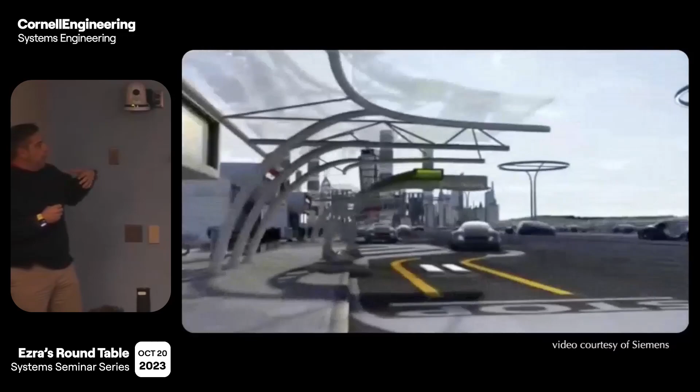We're about to transform from typical conventional vehicles with internal combustion engines and move on to completely electric vehicles. With this transformation, we have several opportunities and challenges. For example, we have the opportunity to upgrade our existing transportation infrastructure and enhance it with fast charging stations that can fast charge electric vehicles.

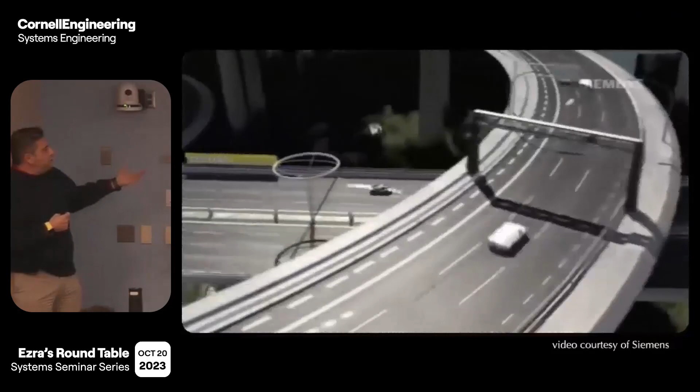We have opportunities to develop control technologies that can help us manipulate the increasing electricity demand from electric vehicles and optimize this demand in a way to avoid overloading the grid. We have opportunities to integrate the vehicles with commercial or residential buildings and eventually create off-grid buildings. With the introduction of connected and automated vehicles, we can share information from the vehicles and do better controls to optimize transportation efficiency and, of course, safety.

If you look at all these applications, there is a common theme: we have some cyber component, information or data, that we use to control the physical entities. So we typically address cyber-physical systems.

Now you might ask me, why do I focus so much on transportation? Well, in 2017, the United States consumed on average 19.6 million barrels of petroleum daily, and transportation accounted for 71% of that usage. This usage is enough to fill up the Empire State Building two times per day just to propel vehicles. So you can see the impact of transportation on energy is significant.

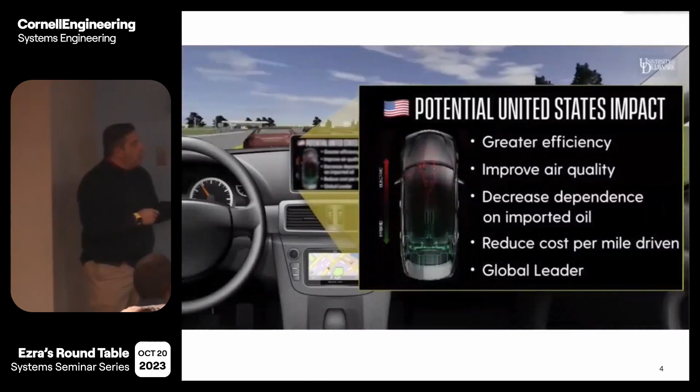With the introduction of connected automated vehicles, we have several opportunities to improve transportation energy efficiency and overall safety. So today I plan to show you some case studies spanning learning for CPS, particularly in advanced propulsion systems, and some model-based control approaches in connected automated vehicles. Through these case studies I've had the chance to work on in the past, I will try to highlight the challenges and opportunities in learning and control.

At the end, I will try to convince you that if we can combine learning and control tasks in specific applications under the CPS domain, we might be better off.

Before I get started, let me introduce and acknowledge the contribution of my students in the IDS lab. In the IDS lab, we develop theories and algorithms that can help cyber-physical systems realize their optimal operation while interacting with the environment. The focus of our research is mainly on emerging mobility systems and smart cities.

To validate some of our approaches, we have built a scale smart city which covers 20 by 20 feet. This is being rebuilt as we speak in the Hollister Hall, so it should be ready in about a month or so. In this city, we have about 50 robotic cars that we can use to prove some concepts in transportation. These cars are on a scale of 1 to 25.

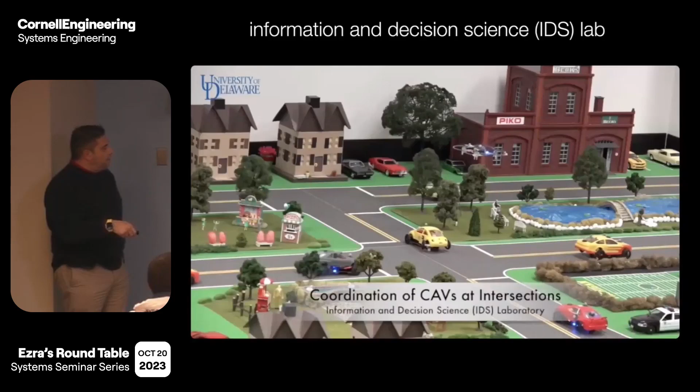We can use this to show how we can use drones as coordinators to collect information from the transportation system and then pass this information back to the vehicles in order to improve efficiency. As you can see here, in this case, the coordinator collects information from the vehicles and the vehicles can cross the intersection without stop-and-go driving. So we use this testbed to do those kinds of experiments in a safe environment.

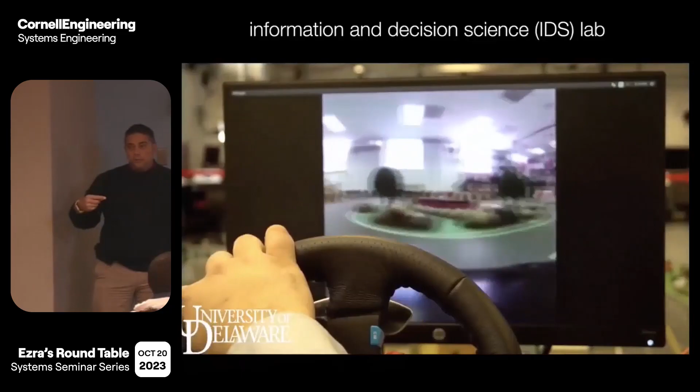We have also integrated a driver emulator into the robotic cars, so we can drive the robotic cars in the scale city and have a mixed traffic environment where connected automated vehicles interact with human-driven vehicles. The vehicles have a small camera in front, so as you drive the car, you can see through the monitor what's going on in the traffic conditions ahead of you. So the camera is over here, if you can see. This is another nice feature of the lab.

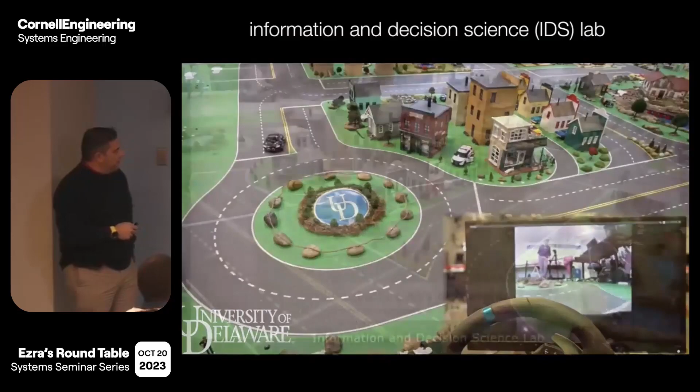We can also use it to have cooperation of ground vehicles with drones in specific scenarios that we want to validate, some of the game theory work that we do. We have built a digital replica of our scale city, and we can use this for our collaborators to sign in and do some experiments remotely.

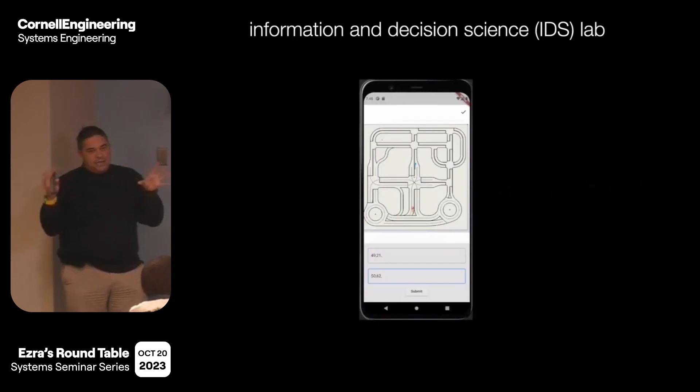Finally, we have developed an app that replicates shared mobility, where if you come to the lab, you can download the app and then call any of these little cars to come over to your origin, and then you can assign the destination. Through this app, we can validate some of the optimization algorithms that we develop in the lab and see the eco-routing approaches. So there is an infrastructure, and at the end, once you have different origin-destinations, you replicate some sort of traffic conditions, and then you can apply some of the optimization algorithms that we develop in the lab.

The city was featured in the IEEE Control Systems magazine last December, making it onto the front cover. We also have a driver simulation testbed with 6 driver emulators, and we use commercial software that can replicate any city that we want to investigate.

So with this little introduction, let's get back to the technical work.

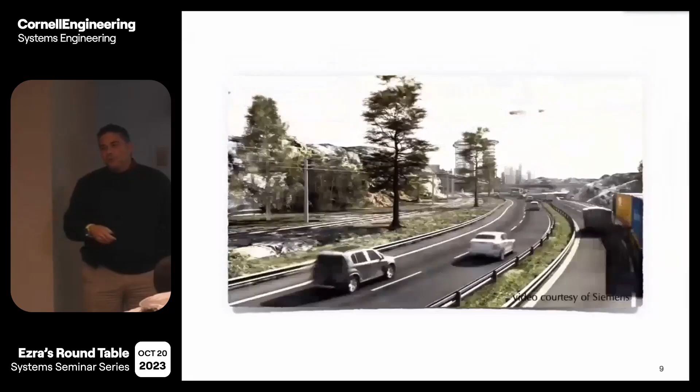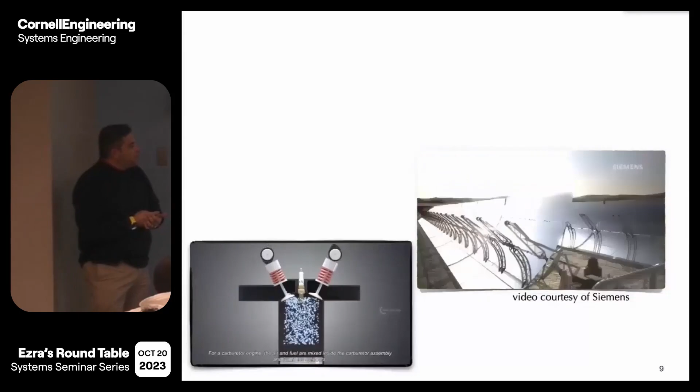Over the years, I have had the chance to work on different areas in transportation. I started with my dissertation, where I developed algorithms that can make the engine in a car learn the driver's driving style and eventually optimize its operation. Then I moved on to hybrid electric vehicles and plug-in hybrid electric vehicles, and developed power management control algorithms that can help us improve the efficiency of these vehicles.

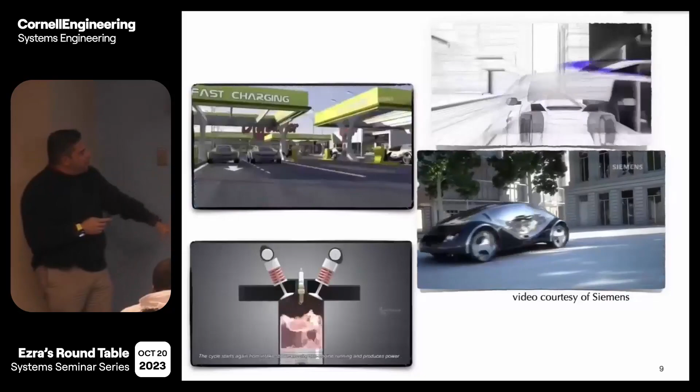Over the last 13, 14 years or so, I've been working on connected automated vehicles and how we can use shared information to improve transportation efficiency and safety. So what I plan to do is walk you through my journey, and as we go along, I'll highlight several technical challenges, and at the end of the story, have a lot of movies. So hopefully you have something to eat and enjoy, it's more entertaining. And then at the end, I will make the case about how we can combine learning and control.

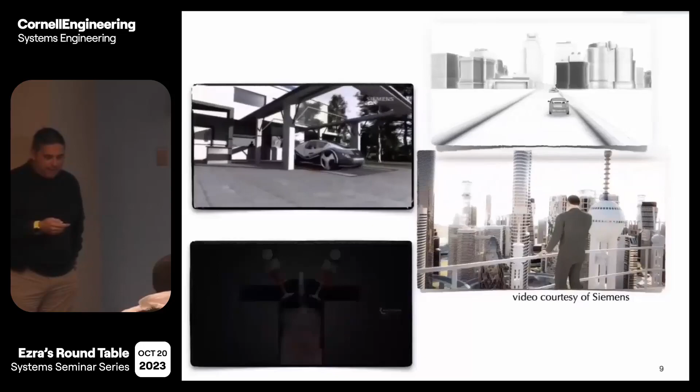My journey started in 2003 when I arrived in Detroit from Greece with 6 inches of snow, and I had to find a topic for my dissertation that would keep me busy for the next 5 years. As I was reading articles, as perhaps some of you are doing as we speak, to find an interesting topic for my dissertation, I came across some articles that essentially all had a common question: why can we not achieve the miles per gallon posted on our window sticker in cars? So I thought this was an interesting question that would keep me busy for the next few years, and I started digging into this.

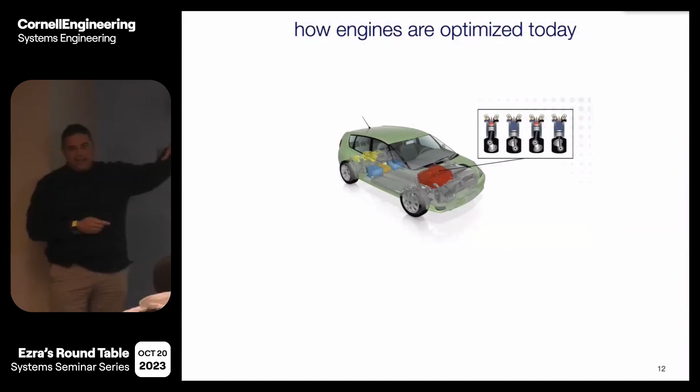So when we buy a car, the car comes with a window sticker, right? And it says this is the miles per gallon fuel economy for your city driving, and this is for your highway driving. And although most of the time you can achieve the fuel economy estimates for highway driving, you can barely achieve those estimates for city driving.

Let's see why this is the case. To understand engine operation, we need to look at the engine operating domain. You have a map of the engine, which is engine torque versus engine speed. These colorful contours are called BSFC maps, brake specific fuel consumption maps, and they give you fuel consumption per unit power.

So the lower the value, the better the fuel economy. As we drive the vehicle, this is the speed profile. As we accelerate, if you look at the engine map, you can see a point jumping from point to point inside the map, and depending on how you drive and where the point is located, you have a corresponding fuel consumption. Now, how do we optimize engines? The OEMs typically take the engine and discretize the engine operating domain, this colorful map, with a finite, typically small number of steady-state operating points.

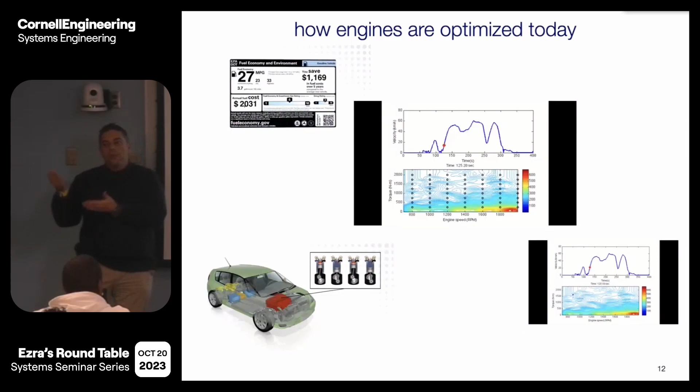When I say steady-state operating points, I mean constant torque and constant speed. They operate the engine at every steady-state operating point and compute the optimal values of injection timing, spark timing, all the variables of the engine. Then they have a big map, and they put it in the engine control unit of your vehicle. So as you drive the car through different operating points, the engine interpolates the values corresponding to the optimal points of the steady-state operating point, and this is how you operate the engine optimally.

However, when I was a graduate student in Michigan, some colleagues of mine did experimental work, and here's what they found. If we operate the engine at steady-state operating points, we have constant fuel consumption. This is why we get the estimates of highway driving, because the engine has been optimized for steady-state operation. So when you drive your car with cruise control at constant speed, this is how you get the maximum fuel economy.

However, if you approach this operating point from a sequence of operating points, fuel consumption will vary for a small transient period. And most importantly, if you approach this operating point from a different direction, fuel consumption is associated with different values. This is why we have the discrepancy when we drive in the city, because we drive in stop-and-go mode, a regime the engines have not been optimized for.

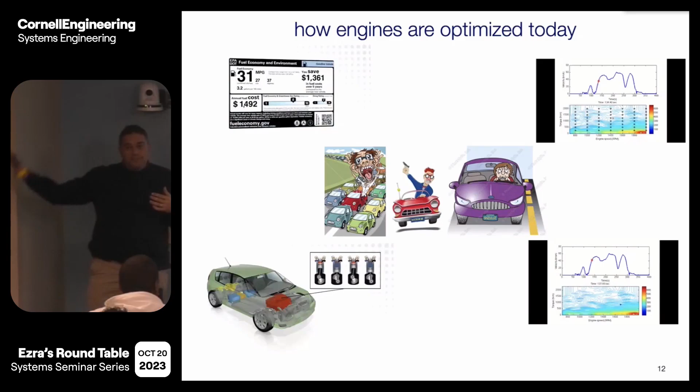Now, how can we optimize the engine for all these different driving styles? Well, this is impossible, right? Because everybody drives differently, so we can't really a priori optimize the engine for all these different sequences of engine operating points. So here's what I did for my dissertation.

I took the engine and applied what I had learned in the stochastic optimal control class, which by the way I'm offering next spring, called optimal control and decision theory. You might want to sign up.

So I modeled the engine operating point transitions as a control Markov chain, and then I learned the transition probability matrix as the driver drives the vehicle. I showed that this probability matrix converges to a stationary probability distribution, characteristic of the driver's driving style. So as the driver drives and we get a pattern of the engine operating point transitions, I learn this pattern, and then I can derive an optimal control strategy that optimizes my controllable variables for these engine operating point transitions.

So eventually the engine has a self-learning controller that learns the transition probability matrix corresponding to the driver's driving style, and eventually learns the optimal calibration with respect to that driving style. Now, if any other member of the family picks up the car, the engine can recognize that this is a new driver and start learning the new driver's driving style, and so on.

With this approach, we showed that we can improve the efficiency of the engine significantly. Just by doing better controls, you can improve fuel consumption by 8%.

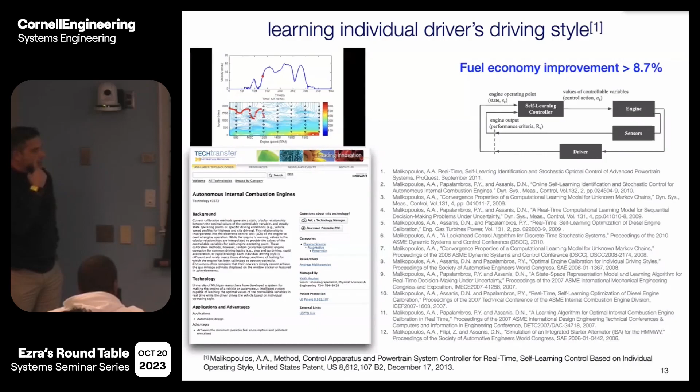Eventually, Michigan got a patent for this dissertation, and I've heard that a couple of years ago they had some discussions to license this technology to a Silicon Valley giant working on autonomous cars, who also want autonomous powertrain systems.

Now, this is all a good story, but I promised to highlight the challenges on the learning part. Well, here's one challenge: in this particular case, I start learning the transition probability matrix from scratch.

And I'm applying some control, exploring and exploiting what I've learned as I drive the vehicle. But in the exploration phase of reinforcement learning, I might pick up a value for the controllable variable for the engine that stalls the engine. And this is something we cannot afford. You cannot drive the vehicle and have the engine stall just because you explored a controllable variable that doesn't work.

And the challenge is that even if you get the feasible domain of your action space precisely to avoid stalling the engine, if you take this feasible domain for a car designed in Michigan to Florida, this feasible domain will change. If you take this car to another state, colder or warmer, it will change. So you can't rely entirely on reinforcement learning, on making your system learn from scratch. You have to have a baseline, some adaptive control schemes that ensure you don't get undesirable outcomes. That's challenge number one.

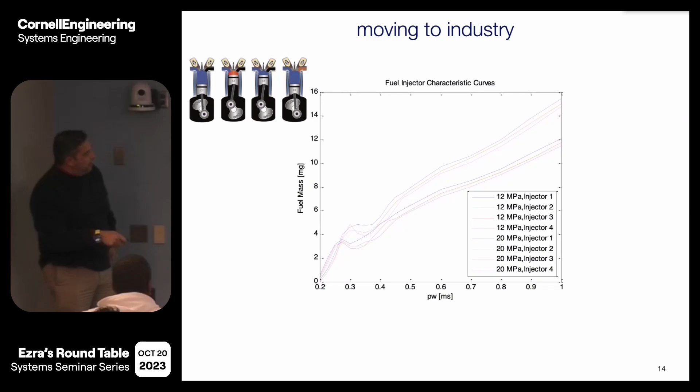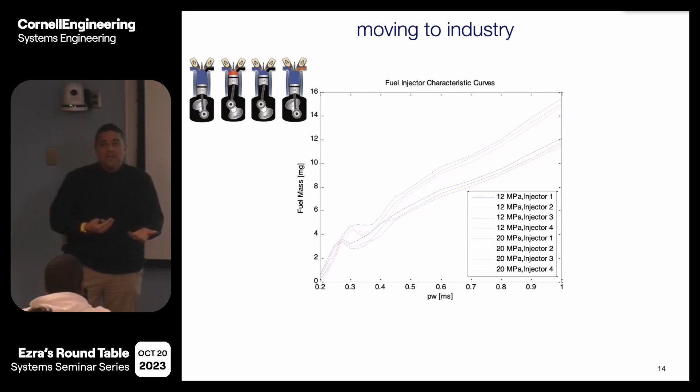But as you can see here, I have 4 injectors with injector-to-injector variation at 2 different cylinder pressures, 12 megapascal and 20. Four different fuel injectors means that if you have an engine with 4 injectors and command the same pulse width on each cylinder, you get 4 different fuel amounts inside the cylinder, which creates imbalances in the engine that can sacrifice fuel economy and emissions. You have to have precise injection of fuel inside the cylinder with a common pulse width.

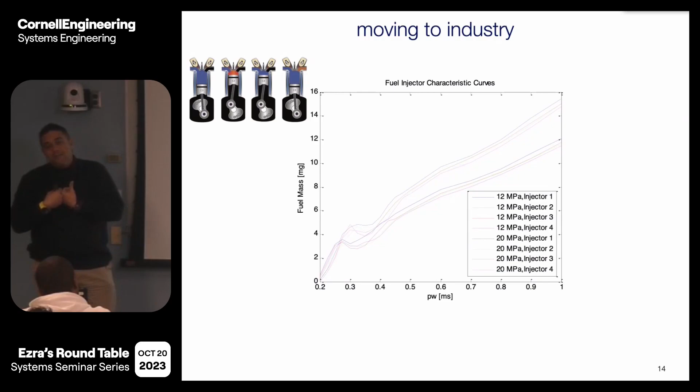So my project was how I could come up with an approach to learn these identification curves. You might think this is a typical, easy problem, just a curve to learn, very standard. Well here's the problem: in an engine, when I command the pulse width and get the fuel, I cannot measure the fuel inside the cylinder. I don't have a sensor inside the cylinder that gives me the amount of fuel injected.

So I don't have feedback, in other words. I don't even have air-fuel ratio on each individual cylinder, I only have a central air-fuel ratio downstream. So for me it was essentially blind. How can you control a system if you don't have feedback, if you cannot measure the output of the system? Eventually I combined a data set available offline and trained a big neural network.

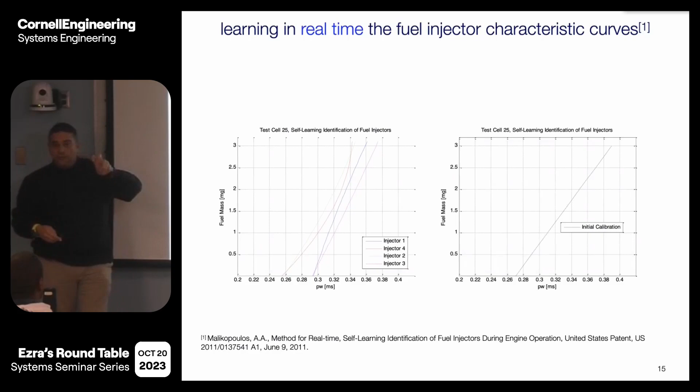But I could not rely entirely on supervised learning with neural networks. I had to attach some adaptive control schemes, and starting from an initial calibration guess, you can see the 4 true injectors, hopefully you can see the 4 different colors. The controller could identify the true injectors in a few cycles, meaning few milliseconds. So by sampling within a few cycles of the engine, I was able to identify the 4 injector characteristic curves by combining supervised learning with neural networks and adaptive control.

By being able to precisely identify the curves, you could improve fuel consumption for the engine by 4%, which is significant, because this costs nothing. It's just a piece of software that gives you 4% fuel improvement.

So what was the feedback or data that you were receiving to be able to do this?

I had offline data giving pulse width versus fuel consumption, experimental data that of course changes. They have fuel injectors, they tested these fuel injectors and collected data on pulse width and fuel amount. But if you take this fuel injector and put it inside the cylinder with different temperature and cylinder pressure conditions, this changes.

So that's why you cannot really rely entirely on neural networks. And then we had to do some adaptive control scheme on the fly just to make this work. And the adaptive control on the fly was based on what information?

Based on the available signals that I have: air fuel ratio, the central air fuel ratio. In the experimental and the demo vehicle that I have, I had also cylinder pressure, for each cylinder I had the pressure. So I had to interpret and extrapolate this information.

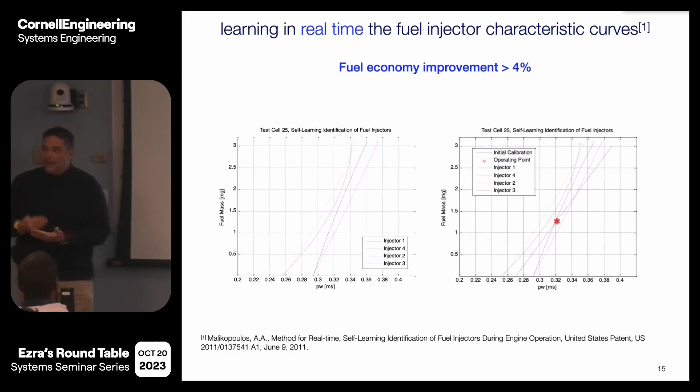And then after this project, I moved on to Oak Ridge National Lab and to another topic on power management and control for hybrid electric vehicles and plug-in hybrid electric vehicles.

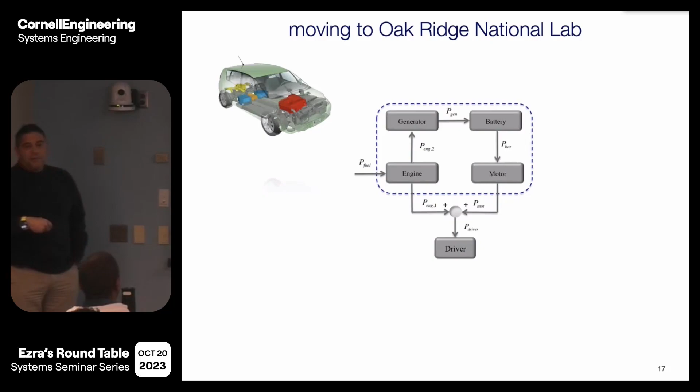So let's see what is a plug-in or a hybrid electric vehicle. In a hybrid electric vehicle, in addition to the engine, you have a motor, generator, and a battery that can power the vehicle either separately or in combination. As the driver presses the pedal position and asks for power, this power is being delivered through different combinations. You can have only the engine, or both the engine and the motor, or only the motor. And as you use the motor, you deplete the battery, right?

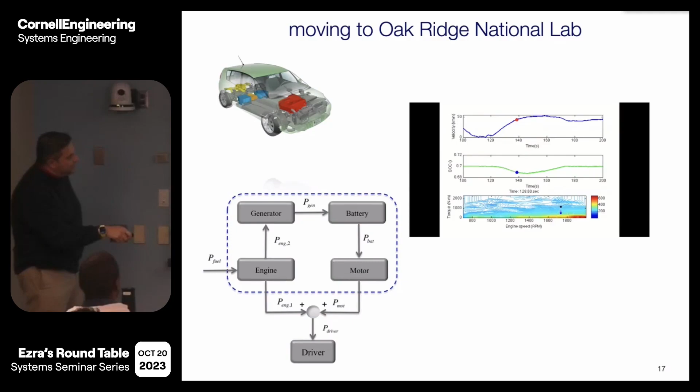So this is a scheme that you have the 3 dots corresponding to the 3 operating points: engine, motor, and the driver. The driver is the black dot, and this torque demand by the driver is being given by the motor and the engine. As you operate the motor, you deplete the battery - this is the state of charge of the battery, so it goes down. And this is the vehicle speed profile.

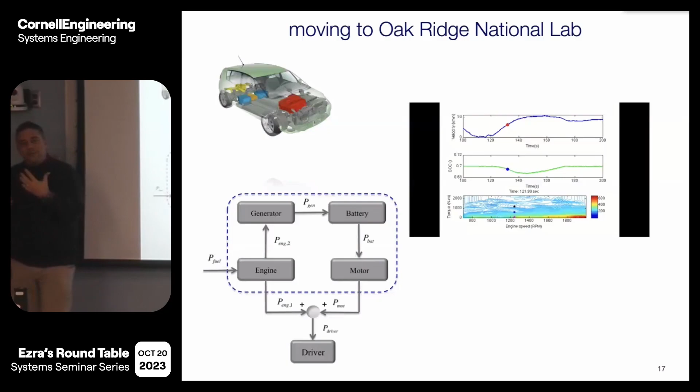So as you deplete the battery, you have to make the decision at some point in a hybrid electric vehicle to charge the battery again. So you have to command the engine to power the generator to charge the battery. So there's a multi-decision making process, but eventually in order to address this, you consider the hybrid electric vehicle as a system consisting of subsystems. And then the first step is to identify the feasible state and control action pairs of this system.

And then eventually you formulate a problem, which you will learn, some of you, when you take my class next semester - I'll keep advertising my class. So you want to derive the optimal control strategy that maximizes the efficiency or minimizes the losses of your vehicle, for any different driver.

Now, to solve this problem in real time on board the vehicle is infeasible. You can't really afford this in a production vehicle. So to address this and make it work, what I did, I reformulated the problem as a multi-objective problem where I want to maximize the efficiency of every subsystem.

I solve this problem offline, and I derive a Pareto optimal set for any different realization of the driver. So I had the map of the engine, the efficiency map of the motor. I put this in a big optimizer, formulated my problem, solved it, and created the Pareto frontier that can give me all the trade-offs between all these subsystems.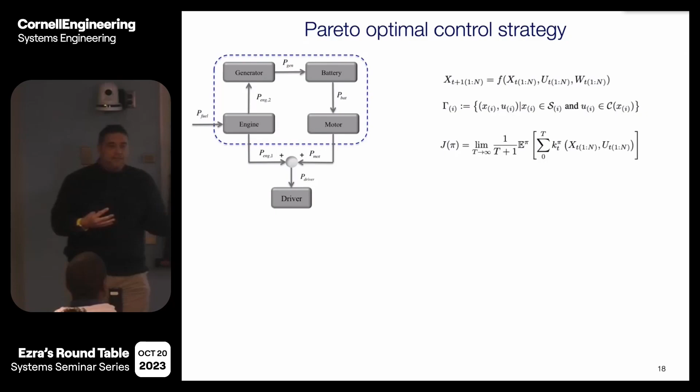And then I took this map, put it in the hybrid electric vehicle, and operated by interpolating the Pareto optimal operating points. And I show in a result that if you operate the system on this Pareto optimal operating point, then the average cost per unit time is minimized. The average cost per unit time means that you want to minimize the cost or maximize the efficiency in the long term as you drive the vehicle for days, weeks, and months.

Anyhow, we did some simulation and compared this approach with reinforcement learning, and we got the same solution - for the reinforcement learning, that was dynamic programming, but using reinforcement learning. We just took the model of the car and ran it again and again over the same driving cycle, and eventually the system learned the optimal control strategy. Then to compare it with our approach, we ran the same model with the Pareto optimal solution in real time once.

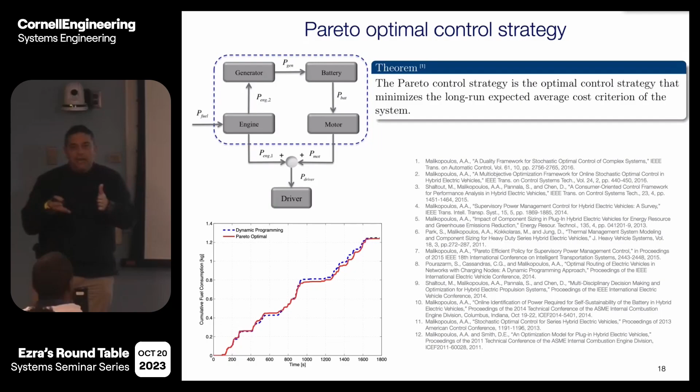By interpolating the Pareto optimal control, we got the same solution.

We went further and implemented this in a demo vehicle. We had an Audi plug-in hybrid electric vehicle, model 2016, as part of the ARPA project that concluded a couple of years ago. We ran the model with Audi's baseline controller that the vehicle has.

Given this operation, we were able to beat Audi's controller by at least 12% in different case studies. This is actually in production, this code. Bosch was my industrial partner, and they have taken this into their portfolio. That project we completed three years ago, so perhaps some of the new vehicles might have this algorithm.

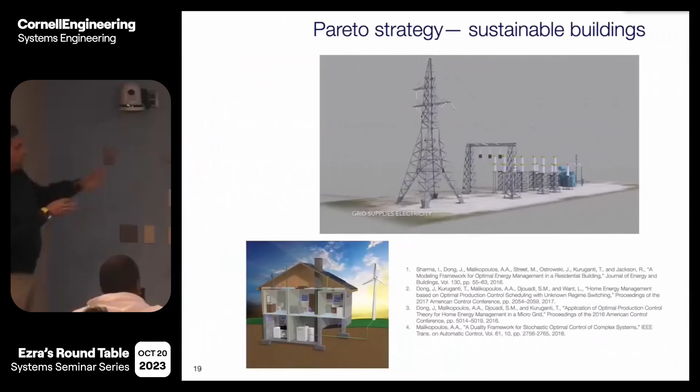So that was the case with power management control, but we use this approach for more.

Are any of these control strategies going to maybe in the future become destination aware, so you know what the terrain is and where you're headed?

Yes, actually, I didn't mention in this project, the goal was to improve Audi's efficiency by 20% by optimizing the powertrain, and also using connectivity and automation, which I will show you later on.

Essentially, the car used information from the vehicles and from the infrastructure, and given this information, we improved the powertrain and also the speed profile of the vehicle by having it coordinate with other vehicles and avoid stop-and-go driving. We also had an eco-routing approach, which took into account the route of the vehicle.

Given that, we could decide about the target state of charge of the battery, the optimal target. So there was a combination. The portion I just showed you was without using connectivity and automation, just the powertrain.

The partners of this project were University of Michigan, Boston University with Christos Cassandras, whom you met, Oak Ridge National Lab, and Bosch as the industrial partner.

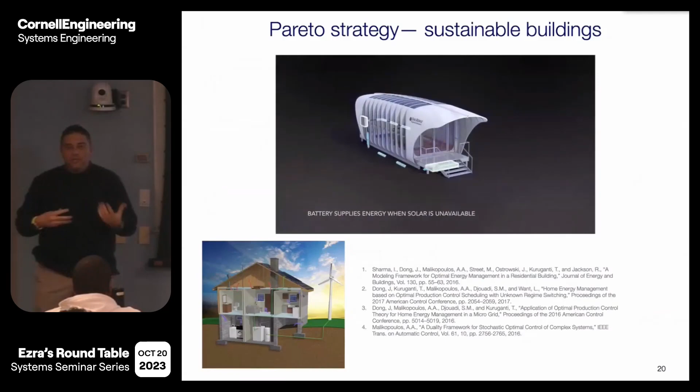We used the same approach in another project at Oak Ridge, where we have a vehicle, a building, and different renewable resources like battery and wind. The goal of this project was to distribute the electricity demand to different resources and make the building independent of electricity from the grid, an autonomous building.

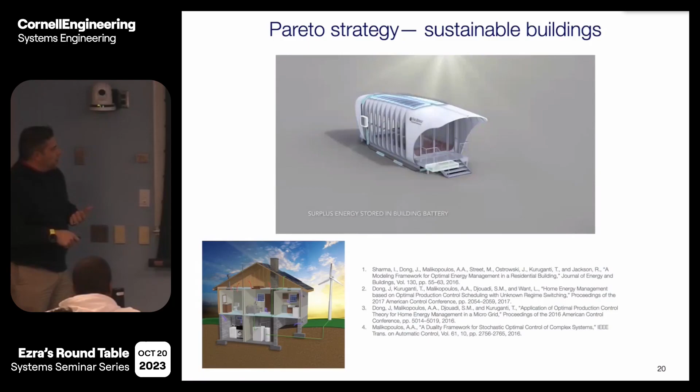In this project, we showcase that when we plug in an electric vehicle, we could use its battery to either charge the building or get charged back, with different combinations and decision making involved in this case.

Then at some point I got involved with connected automated vehicles, and the idea was how we can use connectivity and automation to avoid situations like this. If we have shared information from the vehicles, can we use this information to improve transportation efficiency?

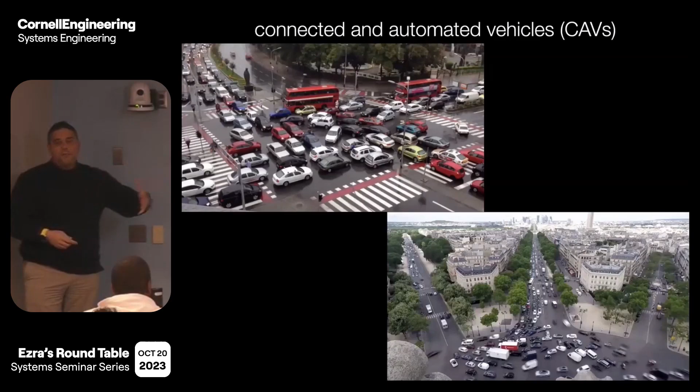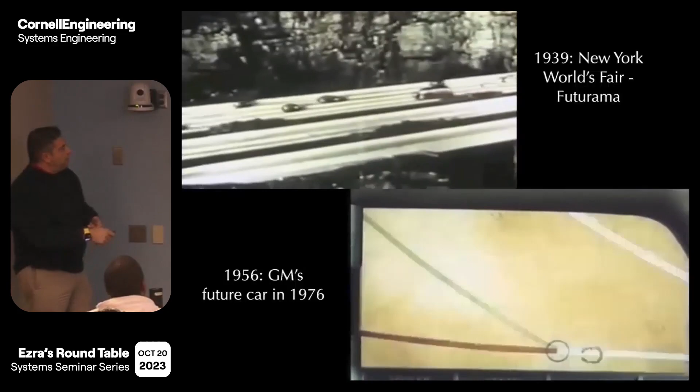Actually, those ideas are not new. In 1939, the notion of automation was first mentioned at New York's World's Fair Futurama, when they envisioned a future world. One big portion of this exhibition was about transportation, envisioning highly efficient transportation systems where all vehicles could cruise at high speeds in a safe way.

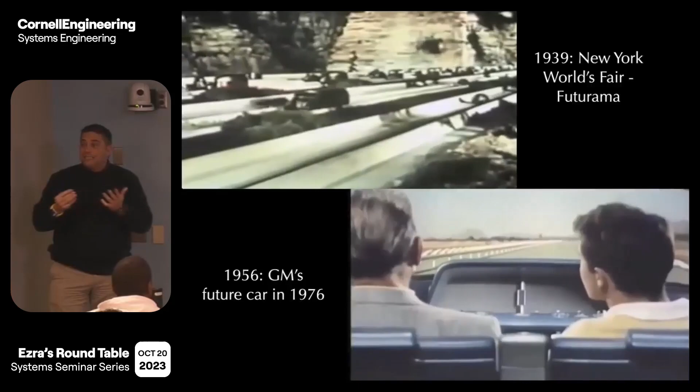In 1956, GM featured a film, '20 Years Into the Future,' showcasing a car that would be self-driving. They showed a family driving to Detroit in this so-called OnStar.

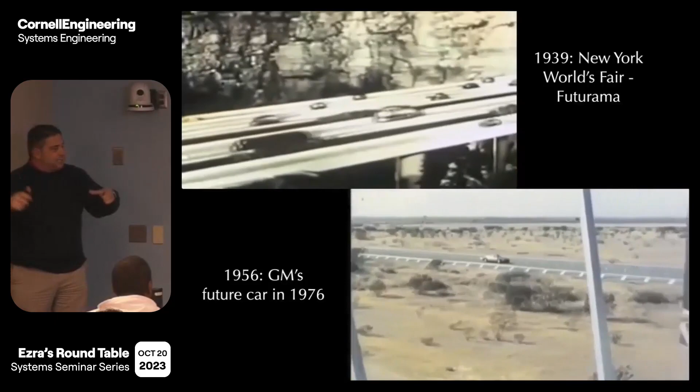If you have a GM car today, they have the OnStar system, supposedly named after this gentleman. The family drives to Chicago, gets information about him, and once they set up the routing, the car goes to a dedicated lane, and from that point on, the car is completely autonomous.

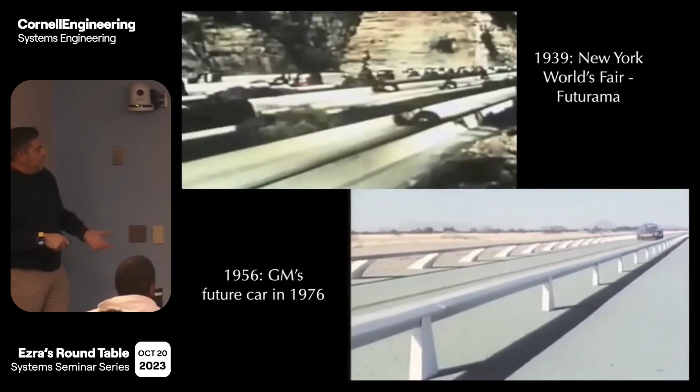Imagine this was a vision in 1956. I think this is the point where the dad fires up a cigar, showing that with this kind of luxury and features in the car, you can enjoy yourself and have some fun, with ice cream and everything. Now, given that we're still working on making this happen, it speaks to the difficulty and challenges of these problems.

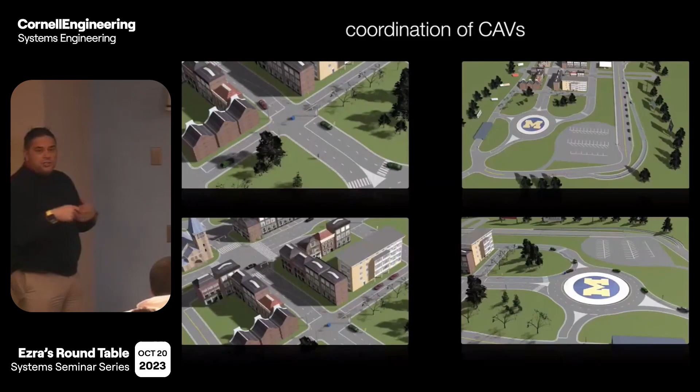It's 2023 and we're still having visions and dreams about getting autonomous cars safely into transportation. Over the last few years, we were able to derive several approaches that can make vehicles coordinate in intersections, in roundabouts, in merging roadways. Essentially, we collect information, and given this information, we do controls to coordinate the vehicles.

Let me walk you through this process and how this works. I'm going to refer to an intersection, but the analysis and exposition later on can be applied to any scenario that you want to consider. So let's assume we have an intersection with 4 cars approaching it.

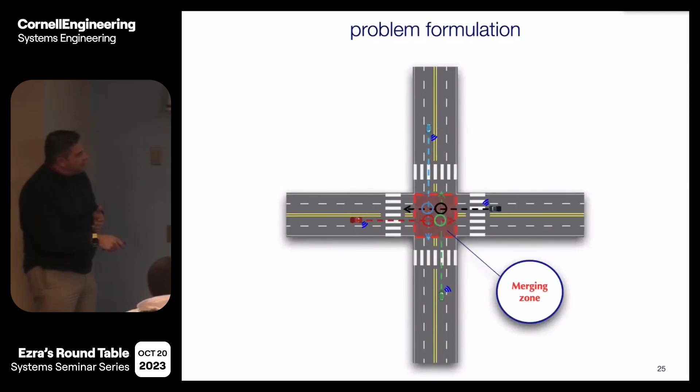If these cars continue crossing the intersection, they will have some conflict at some point at the center of the intersection. The area that will have a potential lateral collision at the center is called the merging zone. We define the control zone outside this merging zone, inside of which the vehicles can talk to each other and exchange information.

So the problem is: once the vehicle enters the control zone and gets information from the other vehicles and the infrastructure, how do we cross the intersection without stop-and-go driving, without signals, without having any collision?

So let's deep dive on this problem a little bit more. Sorry about that, I clicked the wrong button. So if you consider we have the entry of the control zone and the exit of the control zone...

The vehicle starts at the entry of the control zone, gets all the information from the other vehicles, and the idea is to identify the timing that they will be entering and exiting the merging zone to avoid lateral collision with any other vehicles, and also derive the optimal acceleration and deceleration given this time.

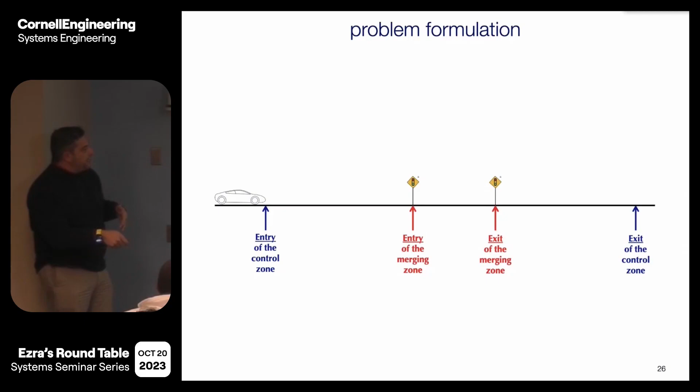So you have 2 problems. First, find the scheduling of these times: entry and exit of the merging zone, and exit of the control zone. Once you find these times, then derive the optimal acceleration that can give minimum fuel consumption.

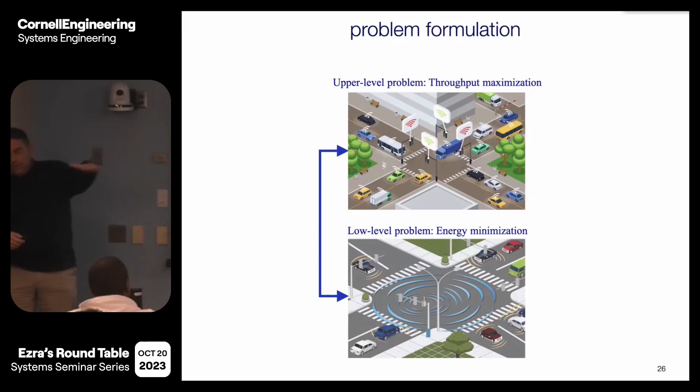So if you think about it, eventually we're addressing 2 problems: a throughput maximization problem, by scheduling the optimal timing that the vehicles will go through the intersection, and an energy minimization problem, based on which, given the times, we want to minimize the acceleration and deceleration of the vehicles.

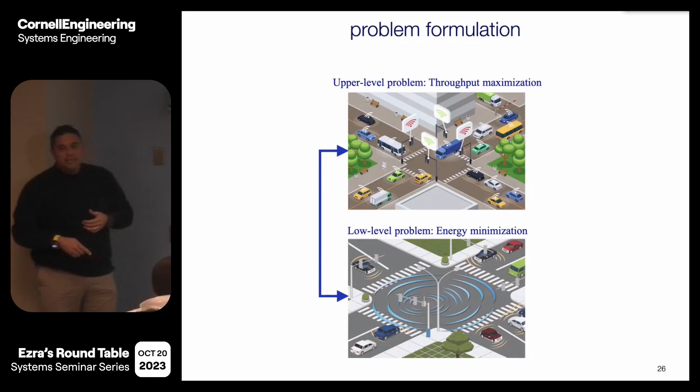In our approach, we model each vehicle as a double integrator, where P is the position of the vehicle, V is the speed of the vehicle starting from the entry of the control zone, U is the control input (acceleration, deceleration), and S is the distance of vehicle i from the preceding vehicle k.

Now, somebody might argue: hey, you use a double integrator model to model a vehicle, that's a huge gap. And that would be a fair argument. This is actually one of the claims I'll make later on about model-based control.

As I said, we're trying to derive the optimal control policy in real time, so we don't have the computational space to use any advanced models. So what we plan to do is use the double integrator model to derive the optimal acceleration of the vehicle, and then use a low-level PI or PID controller to track this optimal trajectory.

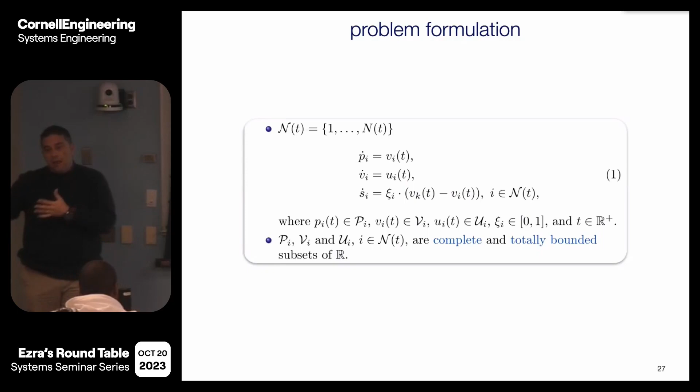So eventually, we translate the optimal control problem into a tracking signal problem, and this is how OEMs design cruise controllers as we speak. So that's the very basic model, given the discrepancy between this mathematical model we use and a real model of the car, which is multidimensional and very complex.

Now, the next step is to define the feasible action set and state as imposed by the physical constraints of the vehicle. So for each vehicle, we have a maximum acceleration and braking capability, and we need to capture this in our framework. We also have a speed limit inside the control zone that the vehicles need to obey.

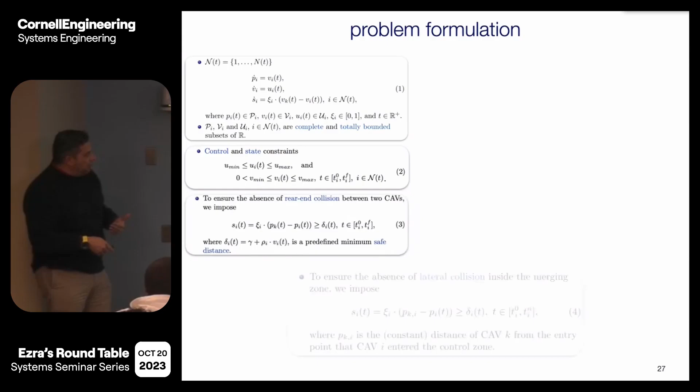Next, we take into account the safety constraints. We have the rear-end safety collision avoidance constraints, so essentially each vehicle i needs to maintain a safe distance from the preceding vehicle. We also have lateral collision avoidance constraints, meaning that inside the merging zone we cannot have 2 vehicles colliding.

Once we do that, we formulate the problem, which is minimizing the L2 norm of the control input. Now, somebody might argue: how come minimizing the L2 norm of the control input, acceleration and deceleration, can give us minimizing the energy? This doesn't have energy units.

If you remember from the first part of the talk, when we minimize acceleration and deceleration, we essentially minimize transient engine operation. We mimic the steady state operation, and this is how you get the fuel consumption benefit.

Now, to solve this problem, we formulate the Hamiltonian analysis. If none of the state, control, or safety constraints become active, we have a nice closed form analytical solution where the optimal control is an affine function. The optimal speed of the vehicle is a quadratic polynomial, and the optimal position of the vehicle is a cubic polynomial.

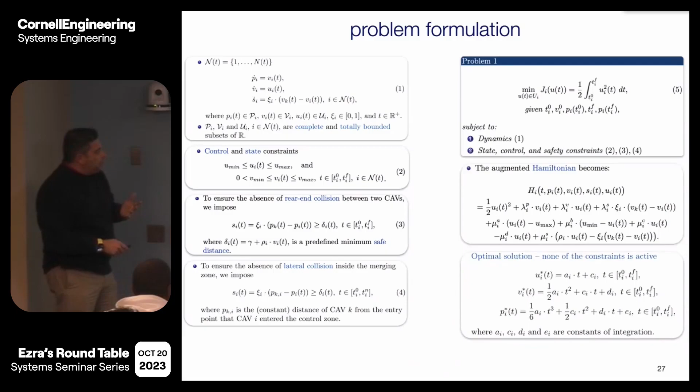Now, if any of the state, control, or safety constraints become active, things get complicated. In that case, what we need to do is piece the constrained and unconstrained arcs together and solve a different problem.

So just to give you a flavor of this: this is the case where none of the state, control, or safety constraints become active. If any of them become active, then you need to piece the constrained and unconstrained arcs together to satisfy the Euler-Lagrange equations, and also the boundary conditions at the junction points T1 and T2.

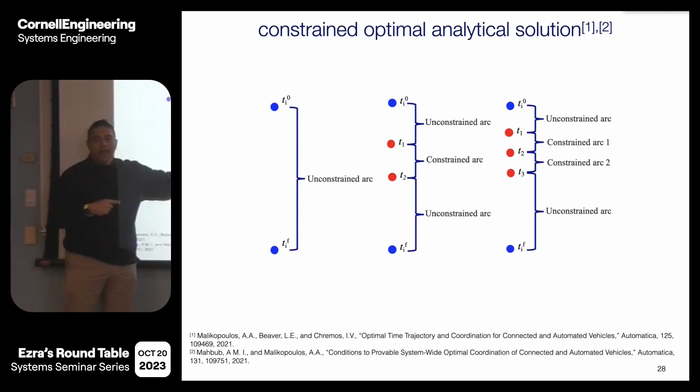This results in a set of algebraic nonlinear equations that you have to solve simultaneously using numerical methods, which means the closed form solution you had before is no longer the case. This implies that you can't really solve this problem in real time when you need it. And even if you get lucky to have a solution, a new constraint might become active, so you have to repeat the process.

Just to give you another flavor of the complexity: if the safety constraints become active, this imposes nonlinearities into the influence functions. To address these nonlinearities, you have to adjoin the Lagrange multipliers with a partial derivative of your constraint with respect to the state, and this is the kind of set of equations you have to deal with at the end.

So you can imagine that you really have to use numerical methods to solve this, which is not something you can afford in real time.

Now, how do we address this problem? How can you solve it in real time, avoiding all the cases where state, control, or safety constraints become active? So we start with the solution of the unconstrained case.

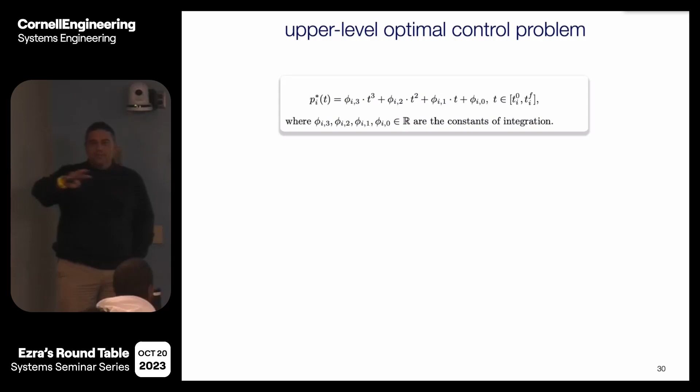Remember, this is the cubic polynomial I had when none of the state control constraints become active. If you look at this equation, it is, first of all, a real valued equation. It's increasing, and it's also differentiable, which means this is a one-to-one function, which means the inverse of this function exists.

If we take the inverse, using Cardano's method for the cubic polynomial, the inverse function looks like this. This is a time trajectory, giving us the time of the vehicle with respect to the distance.

If we derive the time trajectory of the vehicle without crossing any of the existing trajectories, it means we haven't activated any of the state or safety constraints. Now, once I derive this, if I inverse back, I get this equation.

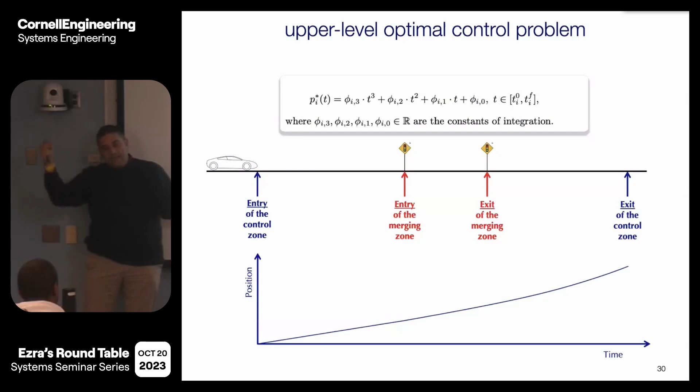So eventually, by deriving the time trajectory, minimizing the time, and then inverting back, I've solved both problems at the same time. I derive my time trajectory by minimizing the time the vehicle will exit the control zone, without intersecting any existing time trajectories, so I didn't activate any state, control, or safety constraints. Then I inverse back and get this equation.

This corresponds to the unconstrained case of my energy minimization problem. If I take the derivative of that, I get the speed. If I take the second derivative, I get the optimal control input, which is the affine function.

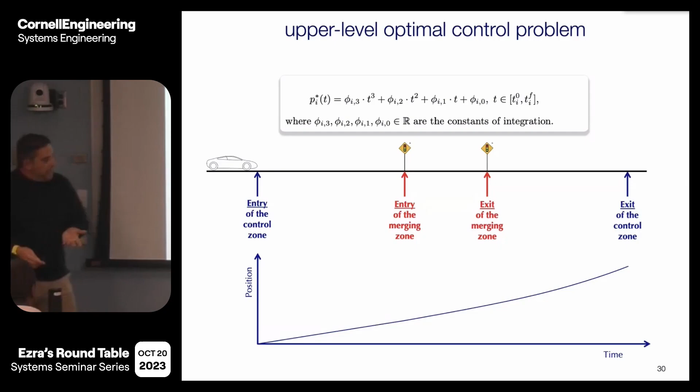Problem solved, right? So just to give you the mathematical picture, this is the visualization of the solution. Essentially, what we need to do is start with this equation, use Cardano's method, and compute the inverse of that.

Then we evaluate the inverse at the exit of the control zone. So essentially, you get the time trajectory evaluated at the exit of the control zone, and you have the phi's, which are the coefficients used to shape the time trajectory. By playing around with the phi's, you can minimize the exit time and the shape.

So eventually, this is your objective function now: minimize this with respect to the phi's. Of course, you have a bunch of constraints to deal with. For example, equality constraints corresponding to the initial and final conditions and boundary conditions of the problem—initial speed, initial position, final position, and so on. And you have a set of inequality constraints corresponding to limits.

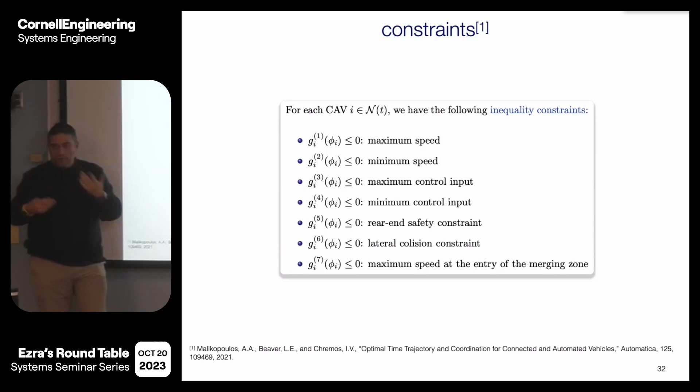Speed limit, the maximum speed at the entry of the merging zone for vehicles when they have to make a turn, and so on. By setting all these constraints, you come up with a nice problem to minimize the time trajectory evaluated at the exit of the control zone, subject to this set of equality and inequality constraints.

You also require the trajectory not to be part of the occupancy set. So essentially, for every lane, you have an occupancy set, which means which portion of the lane is occupied by other vehicles. You want to avoid overlapping, getting a trajectory for the vehicle inside a set that is already occupied.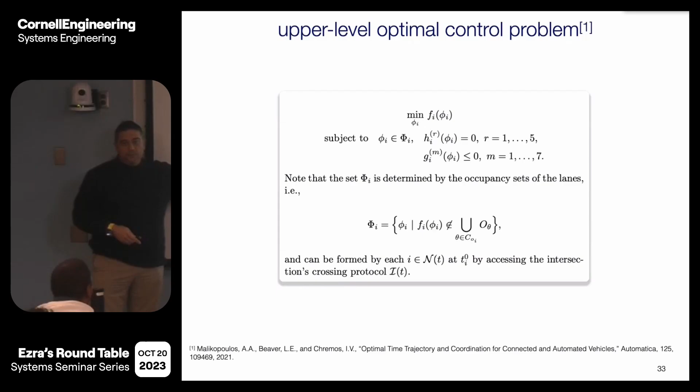Now, the question here is, can we solve this problem in real time? Well, it turns out that the objective function is a convex function, and the set of equality and inequality constraints are affine functions. So if you apply Slater's constraint qualification, you can show there is no duality gap in this problem, which is a nice indicator that we can solve it in real time.

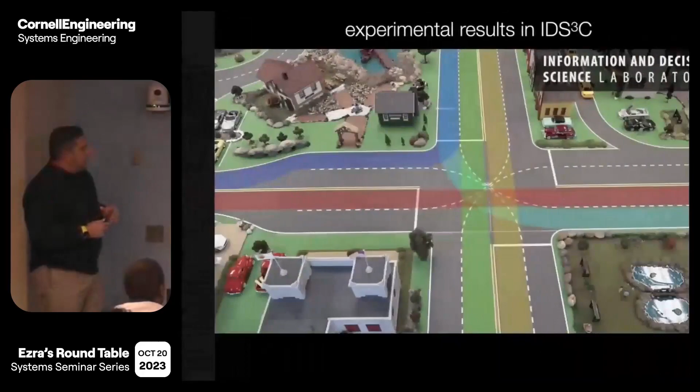We apply this approach to different scenarios, including intersections, merging roadways, and corridors. Let me show you some results. This is an intersection in our scale city. Every vehicle gets into the control zone and starts deriving this optimal time trajectory I mentioned, and you can see how the vehicles cross the intersection without stop-and-go driving, without congestion.

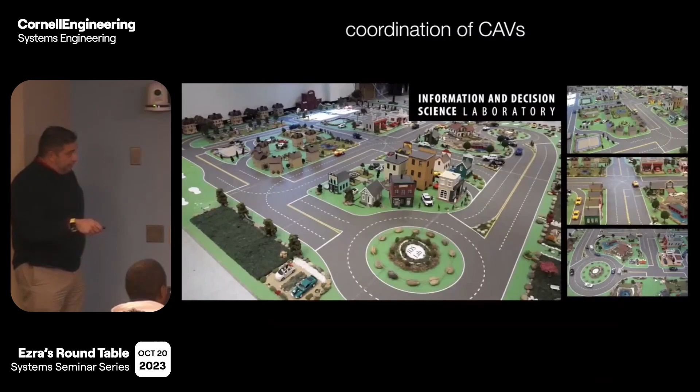This is another case when we have a corridor. We have about 16 vehicles here crossing a roundabout, an intersection, and a merging roadway. You can see how all these vehicles derive optimal trajectories and go through these scenarios without stop-and-go driving and without any collision.

We also developed this in our demo vehicle. That was the second part of the project I mentioned, so we went to the University of Michigan Mcity. There, they have augmented reality, so you can have a physical entity, the car, in the testbed, with a bunch of virtual vehicles interacting and broadcasting with the real vehicle.

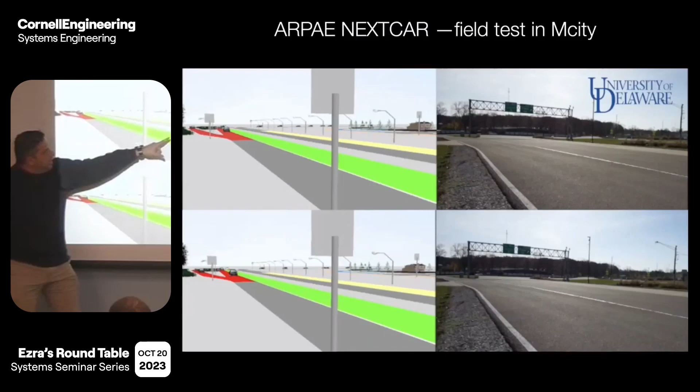As you can see in this scenario, this is the baseline—no connectivity, no automation. And this is the scenario when the Audi drives with our control algorithms. The Audi is alone in the field, but all these black vehicles are virtual vehicles broadcasting with the Audi—the ghost vehicles inside the field.

As the Audi approaches the merging roadway, these black vehicles are broadcasting, and the Audi coordinates with them to get into the merging zone without stop-and-go driving. In this case, there's a black virtual vehicle that blocks the Audi, which waits until it finds a good spot to merge in.

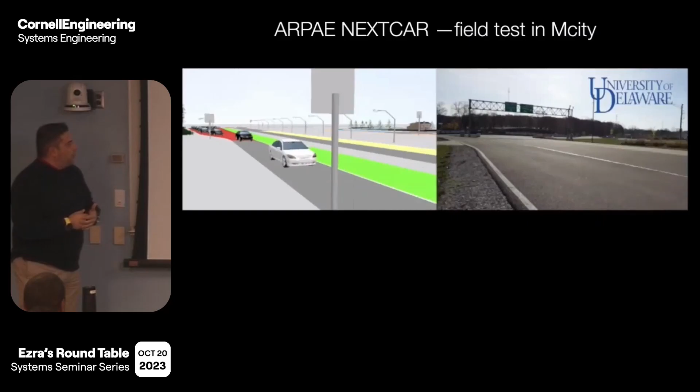So this also replicates the real scenario, but instead of multiple physical vehicles, you have virtual vehicles. This gives you a little less headache on safety constraints, and you can replicate these experiments over and over again with virtual vehicles because you can control the initial conditions.

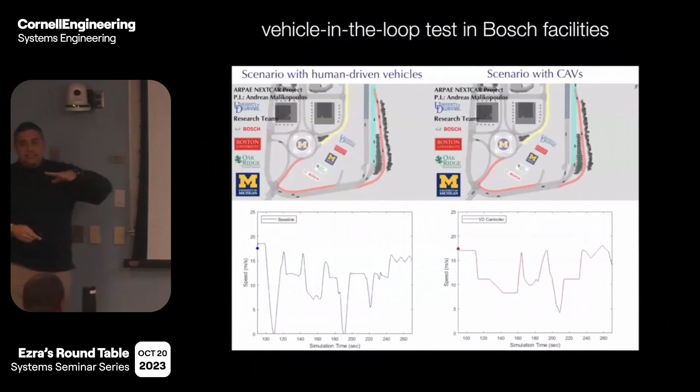We also put the Audi on a chassis dyno in Bosch facilities. So what you're going to see here is the baseline scenario without connectivity or automation.

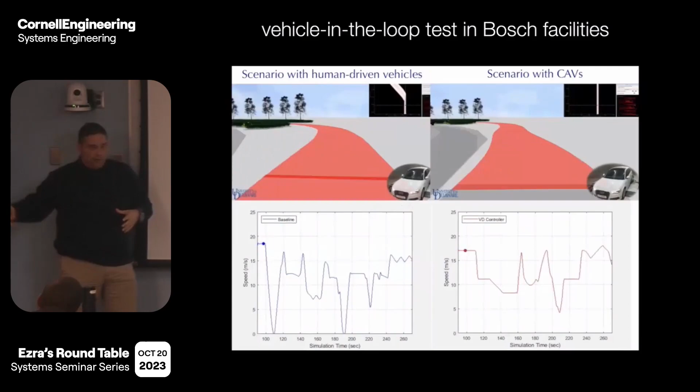On the right is the scenario when the Audi drives with our control algorithms. We put the Audi on the chassis dyno, and the Audi drove through a virtual scenario. This is the speed profile with a baseline scenario. You can see that we have stop and go driving, just because the driver has to come to a full stop in scenarios that have potential conflict.

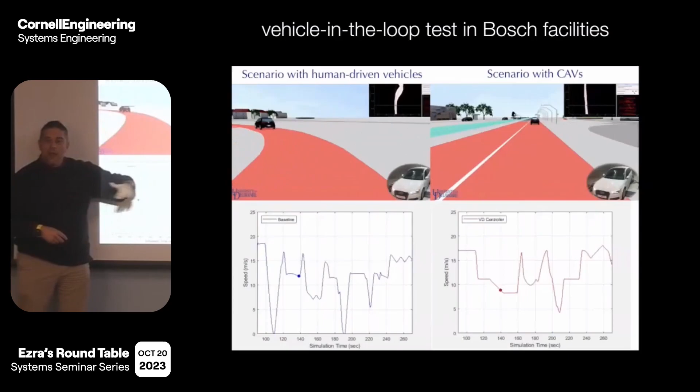This is the scenario with the control algorithms. You can see that we have eliminated this stop and go driving, right? It's like driving on a freeway. If you eliminate this stop and go driving, essentially you get different benefits ranging from 30% all the way to 34%. If you think these values are high, go ahead and compare the fuel economy that you have on your car for city driving versus highway driving. If you do the comparison, that's the kind of benefit you get, because instead of driving in the city, you're essentially driving on a freeway.

So we've seen different methods, and I'm going to conclude with that. We saw a model-based control approach with coordination of vehicles, and we used a double integrator model. So eventually we have a discrepancy between the model and the real vehicle. In order to address this, once we derive the optimal control input, we use a PI or PID controller to account for that.

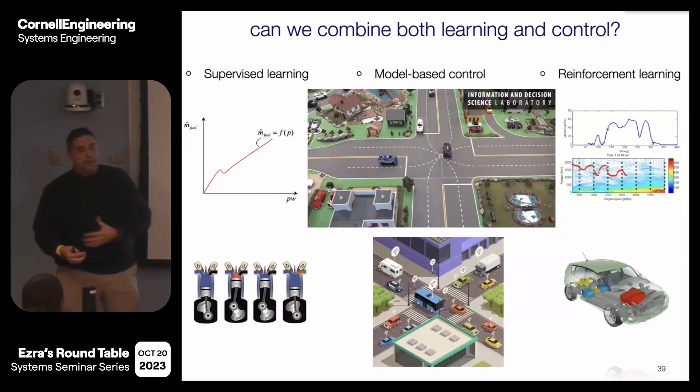In the scenario with the engines, we use supervised learning with neural networks. But again, we couldn't rely entirely on offline data, so I had to do some adaptive control. In the reinforcement learning example with the engine, I showed you that there are robust concerns if you let the car drive or learn the optimal calibration from scratch. So the idea is, can we combine both learning and control?

Now in our approach, what we do essentially is consider that we have an actual cyber-physical system - that's our real system. We have some disturbance in the system, and we have noisy outputs. We get the output, but there's some noise, some errors from the measurement. And then what we want to do is derive the optimal control strategy to optimize the operation of the system.

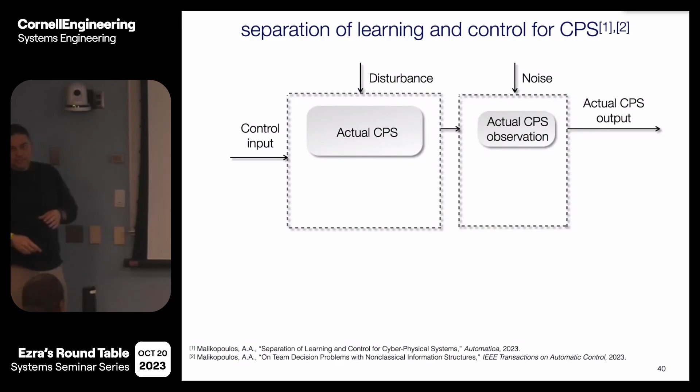Now let's consider that we also have a model, a simple model of this system, and you operate this model in parallel, under the same input, the same disturbance, with some sort of measurement noise. What we do essentially, the key idea, is to establish an information state. This information state includes information from the state of the actual CPS and also the state of the model. If you can show that this information state does not depend on the control strategy of the system, then you can use the model to derive offline this control strategy, parameterized with respect to the information state. Then once you implement this control strategy, you just learn the information state.

There's a little bit more detail on that, but I'm going to skip the discussion for the sake of argument, since I see that you guys look tired from all of that so far. So I want to have some time for questions.

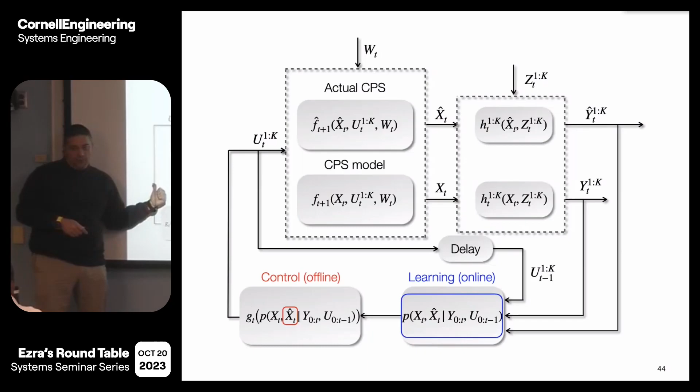So I'm going to wrap up by saying that eventually, with this approach, you can use your model to derive the control strategy offline, parameterized with this information state. Then once you start implementing this control strategy, you derive data from both the actual CPS and the CPS model, and you can start learning the information state. Once you learn it, the policy you derived offline for your system becomes optimal for the actual system. This is an approach we're trying to implement in different applications related to emerging mobility systems. We believe this approach can be useful in cases where data comes to the system in real time and not all in advance, so standard approaches can be difficult to apply.